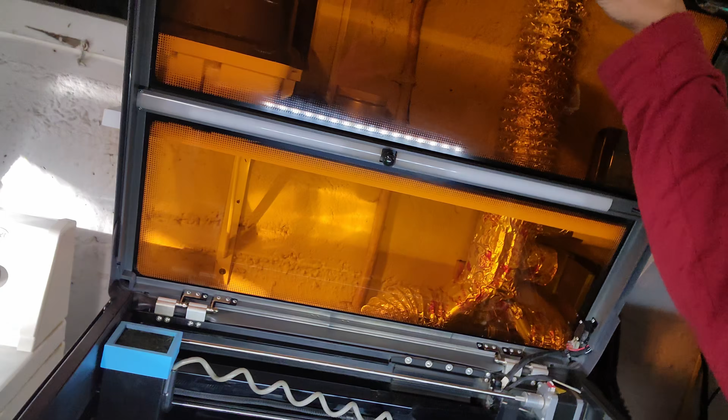So I did some modifications. One of the modifications is a simple shroud that I simply put on the top. Now I know what you guys are going to say - you're going to say, oh no, that's going to prevent the fan from working properly. Well, if you look at it, you can practically see me through it. It's a Chore Boy, and it's actually pretty lightweight.

And I only put it on there when there's a lot of smoke, which there usually is because I do wood exclusively. But I don't think it's going to hurt it too much, because if you've ever heard one of these things, it's got like a jet engine for a coolant fan.

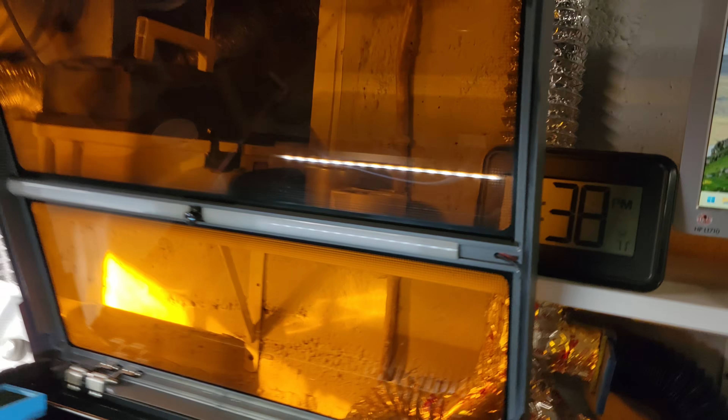Let's see if I can flip you guys around and show you what I did in the back side of it. I printed a bezel that goes from the 3-inch pipe to the 4-inch pipe, because it was such a nightmare to try to attach that 3-inch air duct anywhere. So now it goes to a 4-inch.

And if you can see, pardon the weird angle here, but I actually placed this so I can close off the vent when I need to. These are the two systems, obviously the Xtool S1 and a little case for a laser tree down here.

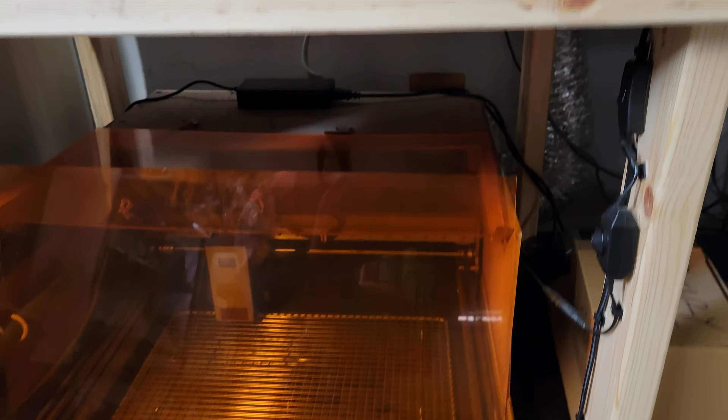I really like this machine now. So yeah, there's going to be another addition.

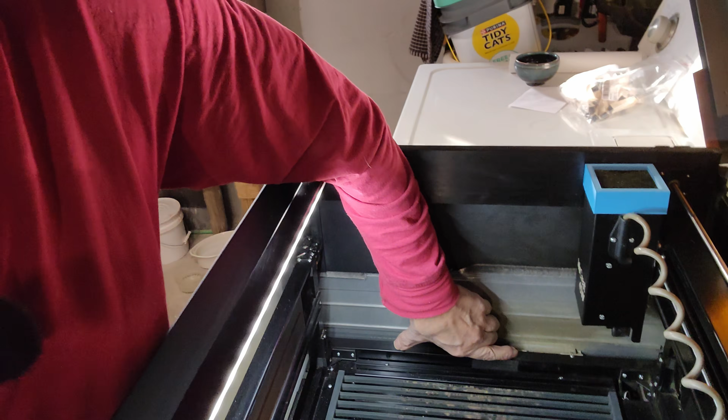What I love about the WeCreat Vision Pro 45 watt is that it has a very easy way to set up their rotary and put the rotary right here. There's 2 screws - it attaches to the frame. And obviously you take these guys out of here. It attaches to the frame and it's very sturdy.

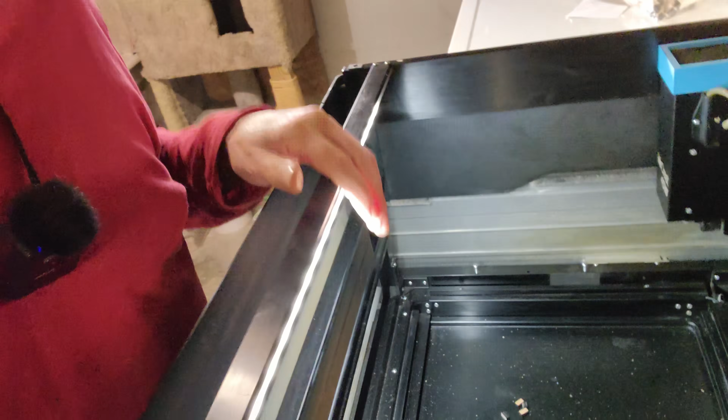And the software allows for you to do your tumblers or whatever. Let me see if I can find the rotary. Here it is - we had a video on the rotary, so you've seen it all before, but here it is. It's nice and compact and very heavy, a hardcore little piece of kit.

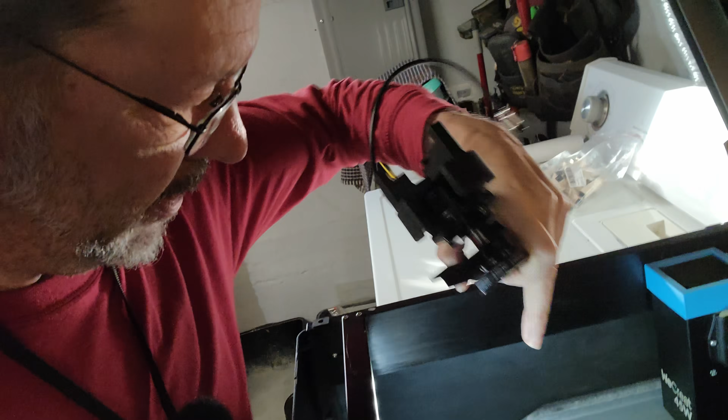And you can see right there is that middle prong that goes down into the middle in between these guys. But the bad thing about it is there's no way to adjust it at an angle.

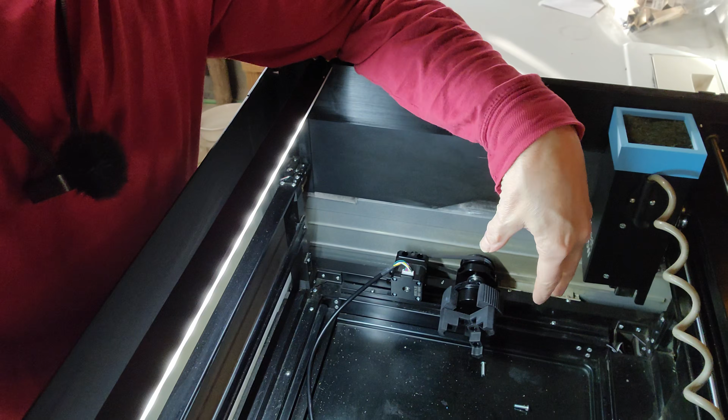Now, a lot of people will have different style mugs and glasses and things, and you'll want it to be able to tilt, because you're going to have something shaped like that you're trying to etch on. And it's not going to allow for a lot of movement with your laser - it'll hit one side of it.

So what you're trying to do is adjust the thing so that will be the angle that you're etching on. Well, that would have to be a down angle. I've seen several things online that will actually hold this entire unit and allow it to tilt, on Etsy and those platforms.

And they want quite a bit of money for them - well, not a ton of money, $50, $30. But why not make one? And so that's what we're doing here.

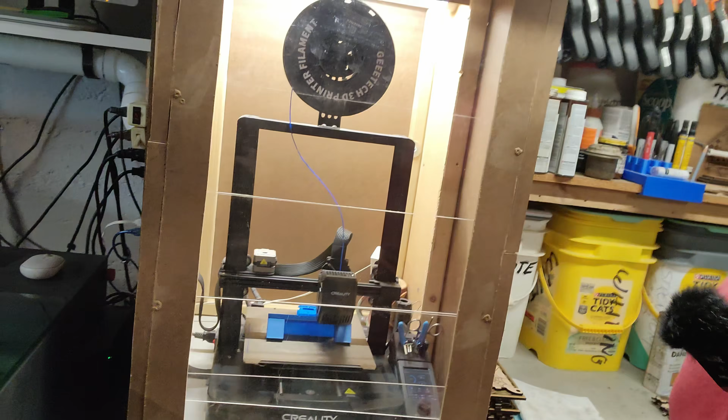We're doing the second part, and I'll show you what the entire thing looks like online right now. If you've only ever downloaded things to use on your new 3D printer and you actually want to make something yourself, I suggest Tinkercad from Autodesk. It's a great online resource for free.

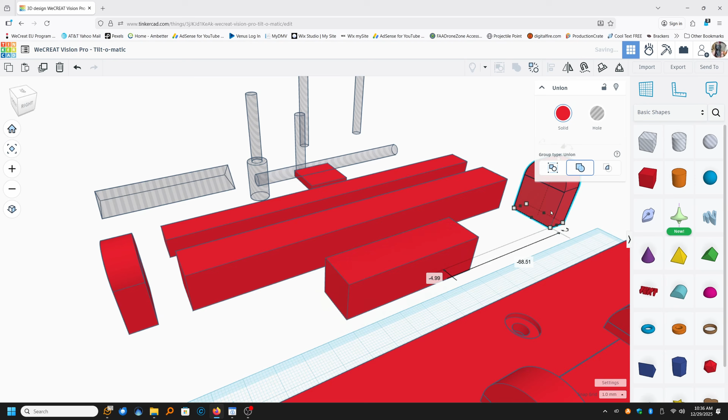And this is the first iteration of this device. Didn't work out so well.

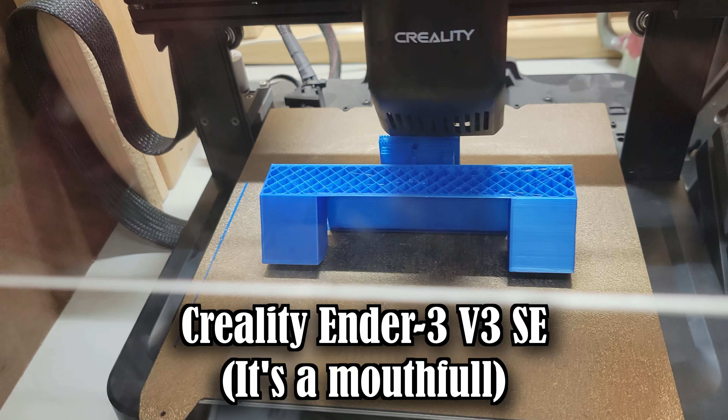After you export it from Tinkercad as an STL file, I bring it into a program that's called a slicer. This slicer is Orca - it seems to work the best with my 3D printer. And the 3D printer I have is a Creality Ender-3 V3 SE, I believe. It's been doing really well for me.

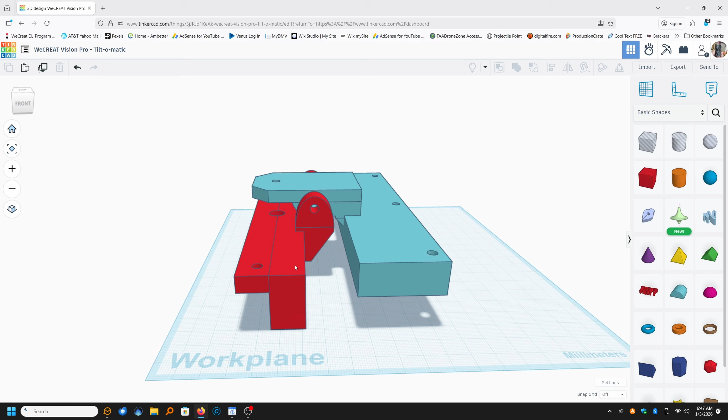These two sections that I made are actually incorrectly designed. I have failed massively. Yeah, so it's back to the drawing board, or back to Tinkercad.

I had to lengthen or extend the hinge so that it could actually point down also, as opposed to just pointing upward. And this is the primary section right here. It seems to look pretty good.

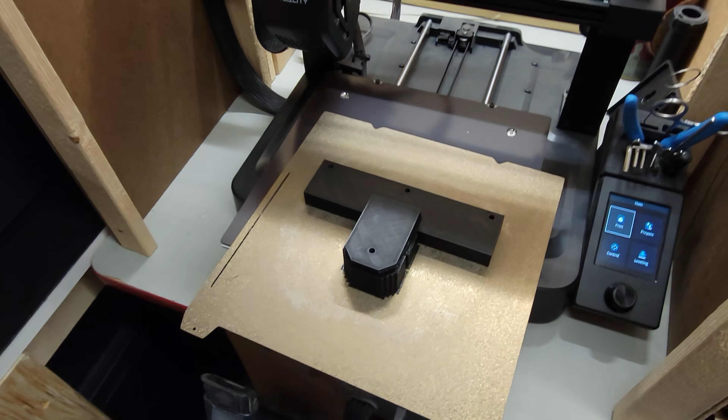I did it out of black - I have a lot of leftover black. What we ended up with...

This is our front piece that attaches to the wall with a hinge on it, hinge point. This allows for a screw to go up in here and to come out. And that screw hopefully will be roughly that size.

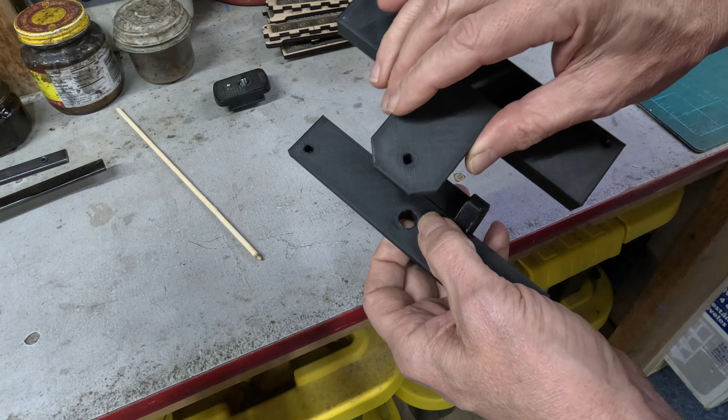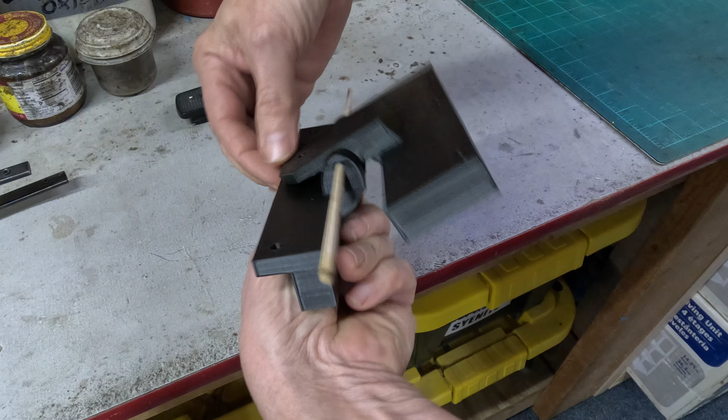Let's see if I can just put this bamboo skewer through here. Yeah, look at that - it's basically a hinge. Now when that's attached to the wall and you tighten this, you should lift it up or allow you enough

downward movement for the rotary so that it actually lets you do something shaped a little more odd, like it would be shaped like a cone, an inverted cone, as opposed to something along that line. So that should work. This is very heavily built, and we're going to keep going.

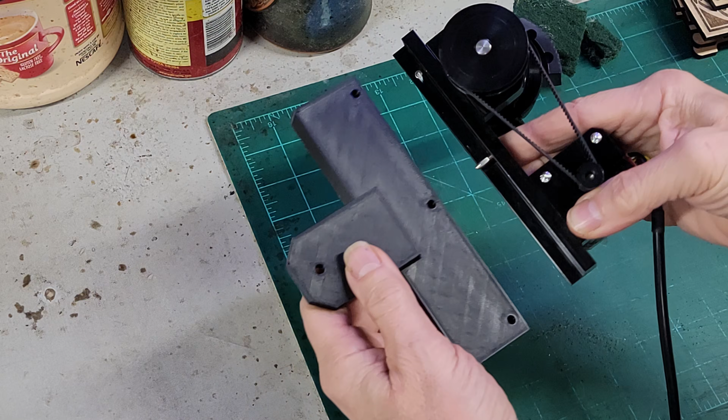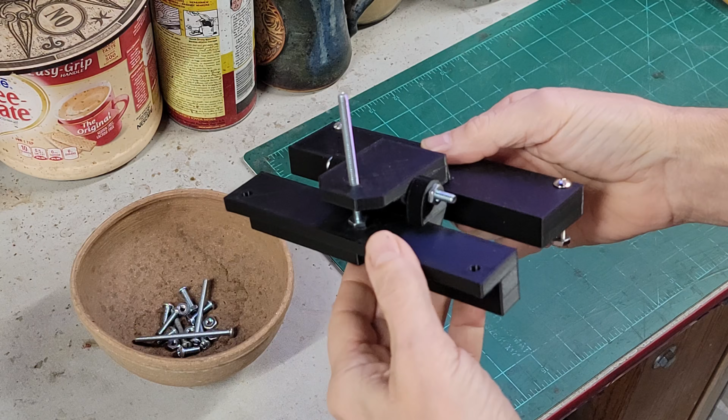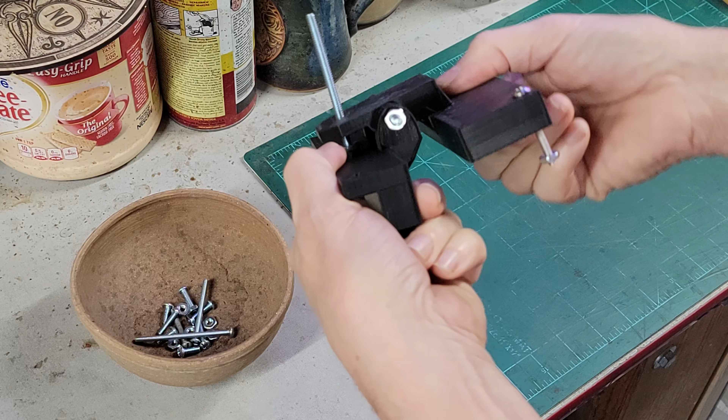Okay, well, it's been a long time coming, but I think we've got a good handle on it. What I've done is I went ahead and put a real bolt through here. I haven't tightened it down or anything. In fact, you probably don't even need the nut on there, but that's going to give us our movement. I found 2 bolts that will work to attach the rotary. Of course, we have our screws, which we've test fitted already.

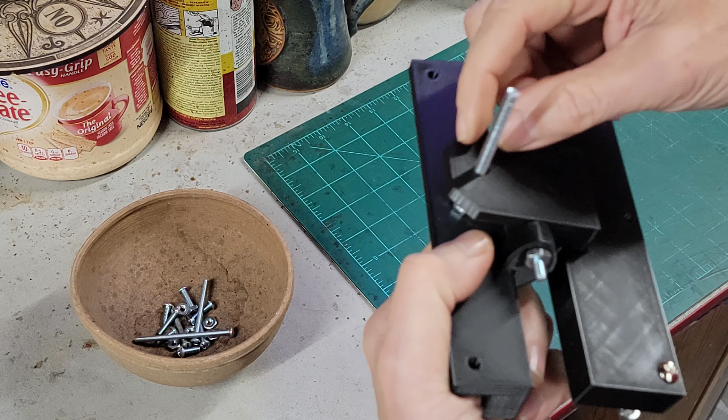This could probably, in the next version of this, instead of just making a hole, which I had to ream out quite a bit with a little file, a little rat tail file - if I make that more of an oval, then it will give full range of motion there.

And eventually, I have lots of little parts. Eventually we will be putting this on there, and I would like to have 3D printed a knob, a big honking knob that this bolt goes up into, because basically what's going to happen is you've got that, and then as soon as you start tightening it, I'm going to hold this down. As soon as you start tightening it, you get it level, or look, it goes up at an angle. Of course, you use a little bubble level, and it stays at that angle.

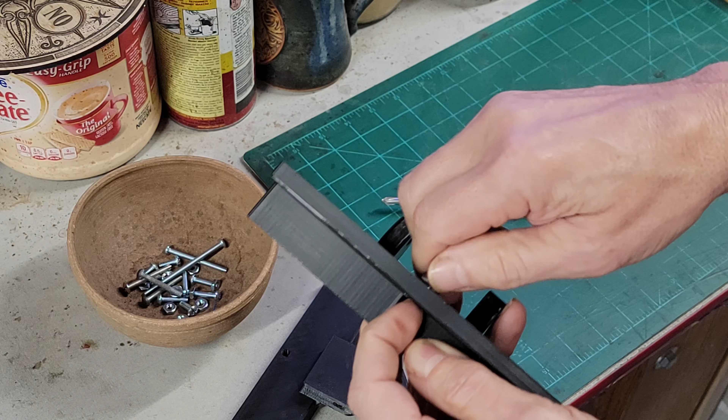Now, before I get too happy with this, I am going to utilize some epoxy up in here and on the top of this, because this post never really needs to move. That needs to be tightened up, but before I tighten it up, I'm going to run some epoxy down in there. I'm going to run it up in here, and I'm going to run it on top of this bolt, or actually run this bolt down on top of it. 2-part epoxy that I am going to mix up very well.

I can just pull this down. Yeah, buddy. And then cover it back up again.

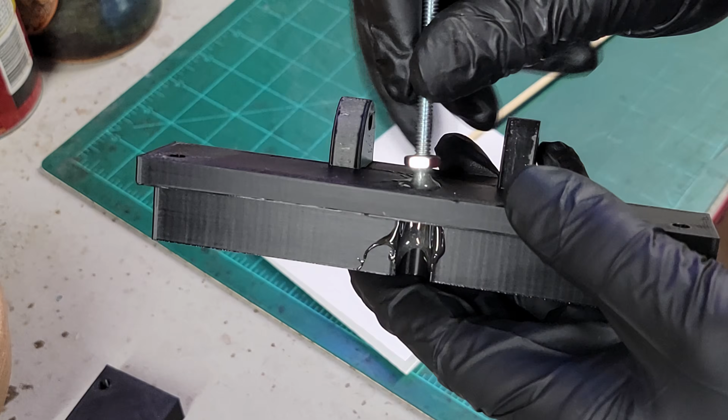All right, while we're waiting for our little friend here to dry with his epoxy on there, I thought I'd just go ahead and reset this back in place and try and run our bolts through here. I've got plenty.

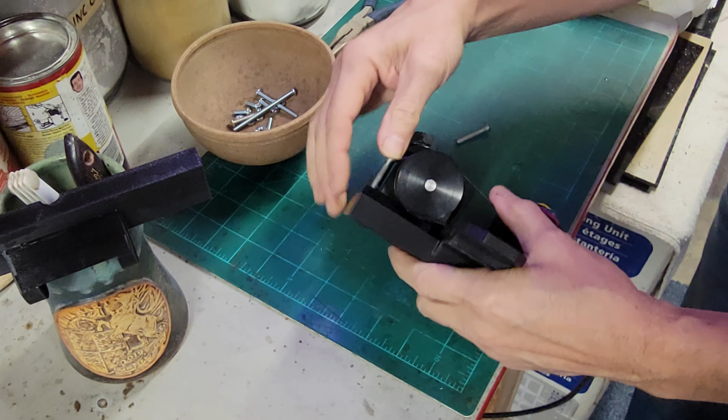All right, well, it turns out that's going to be another case of I really, really, really need a screwdriver. When you design things, it takes a while to prototype them and get them exactly how you want them. This one, it took 2 different prototypes to get to this point.

Gosh, I almost don't need that. Almost don't need a nut on that. I like that. Oh, okay. Well, that one fits better. Boy, that is going to be just perfect on there. There we go.

At first, I thought those were going to be too long, but I am sure glad I found those. Yes, I am. This one here. Wow. That's not going anywhere. Cool. Absolutely awesome. Well, that's a success and a half right there.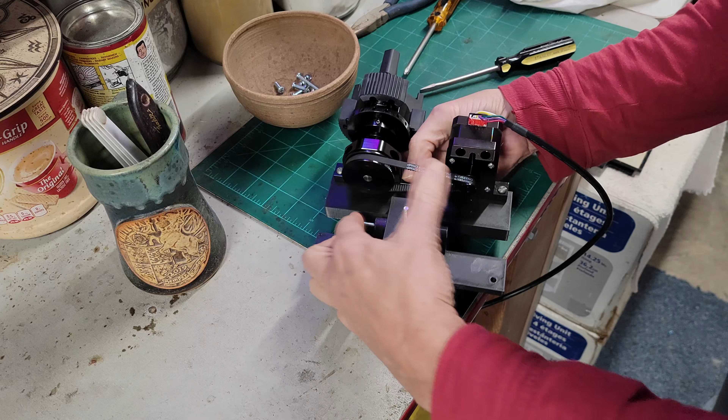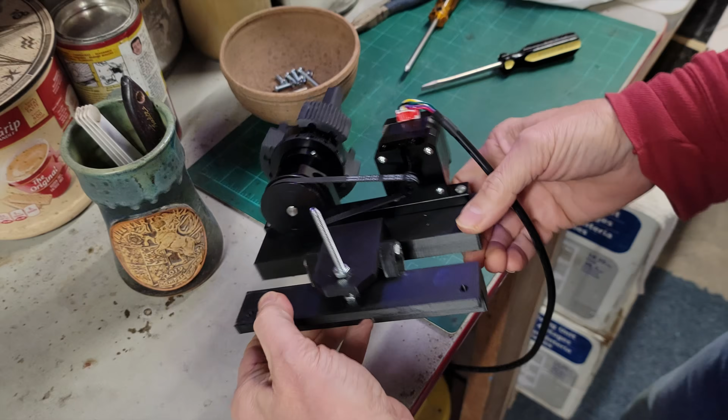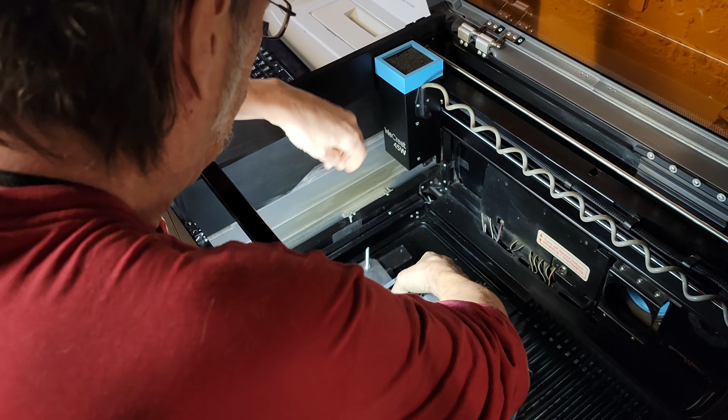Okay guys, moment of truth. Let's see if you can even see me do this. So we're going to take the screws out, and I'll probably fumble ridiculously.

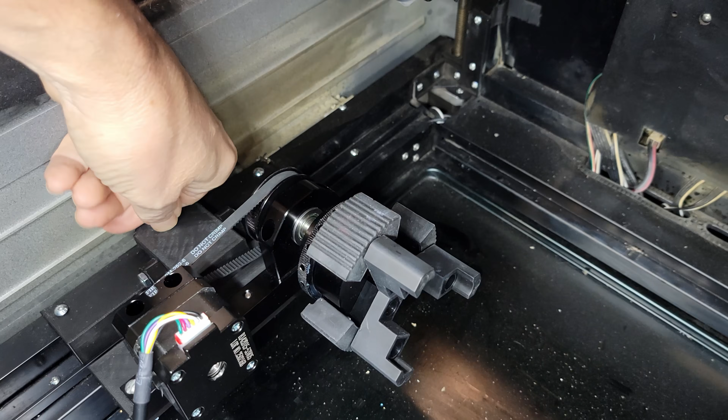That is going to give us a lot of room. And as you can see, it's already raising up, just by me doing that. So by lowering it, well, you can really see that lower. And down. Then of course you'll use your bubble level.

I like that. I like that a lot. Like I said, I'd get a little bit more range of movement if this was more of an oval, that hole. We may do that. The one I put up online for you guys, it will have that implemented. But I'd say that's a great modification right there.

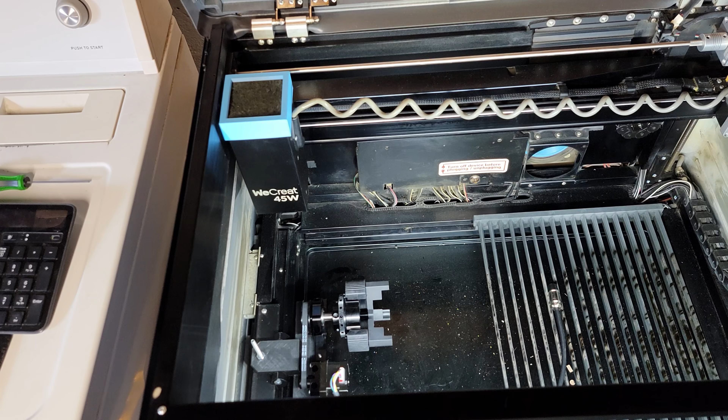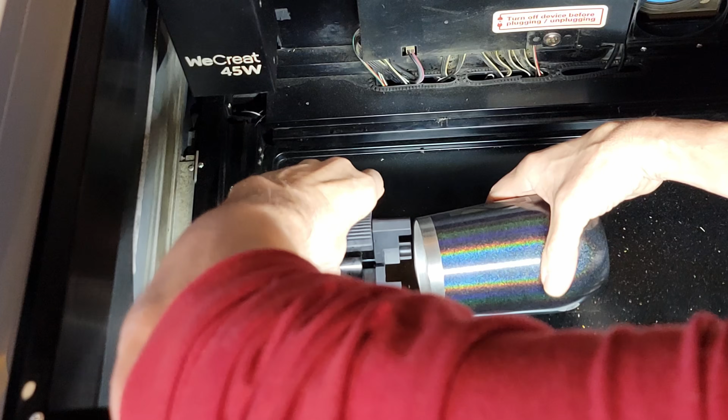Okay, here is a very strangely shaped tumbler that I had a lot of trouble because, well, the thing had to etch a honking weird shape like that. So let's see what happens. What I'd like to do is just see how sturdy this is. And it seems to be holding its own quite well. All right, so it's on there.

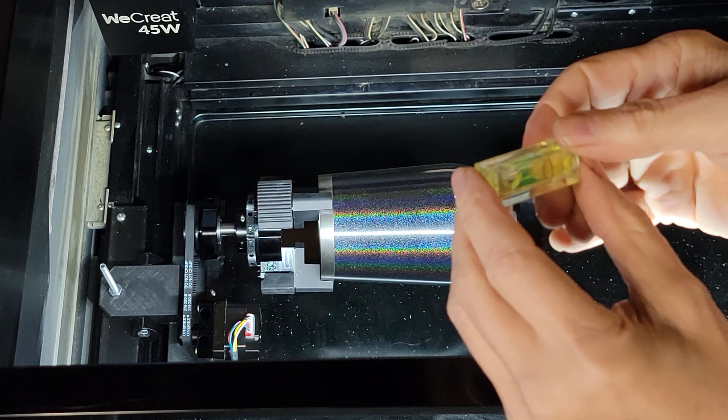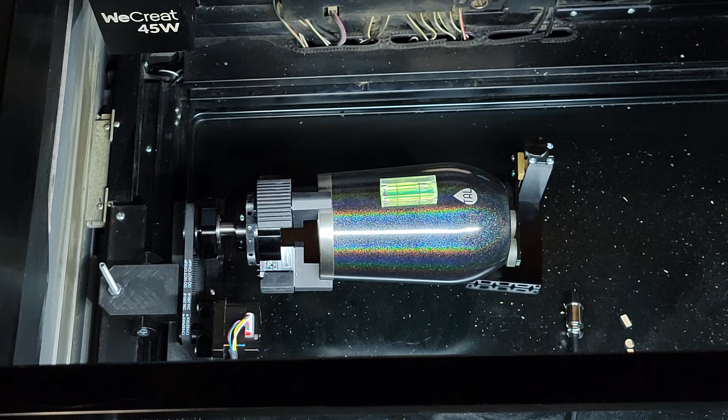Now, the odd thing about the WeCreat Vision and its rotary system that cannot be tilted is they give you a bubble level. Why? Okay, now, assuming we're not going to knock that off there, you guys watch that while I do this.

Like I said, I wish I had a knob. I do have a knob. Look at that. Can you see it? I don't think you can. Let me get you guys closer. Yeah, that's what we're talking about right there.

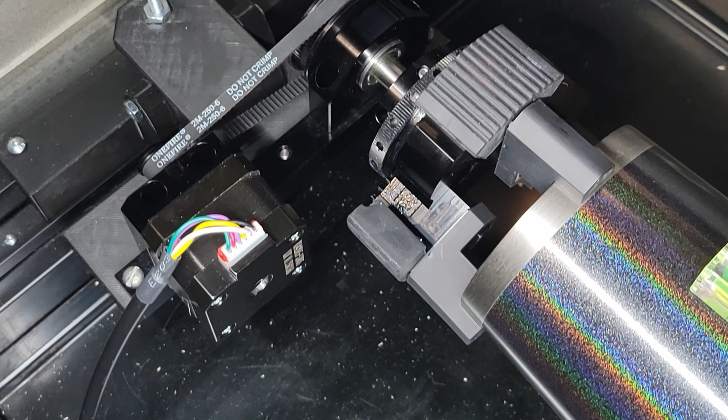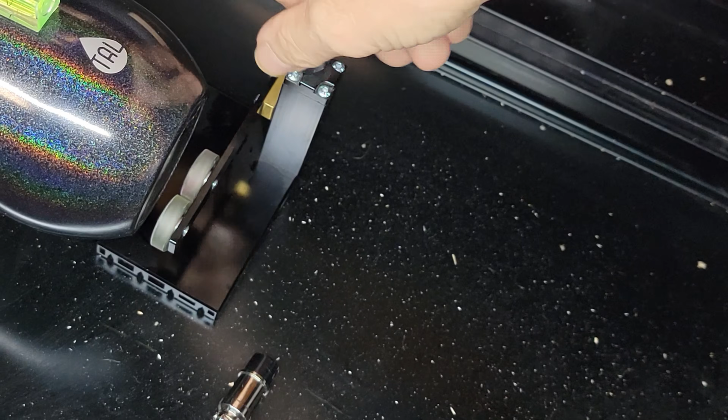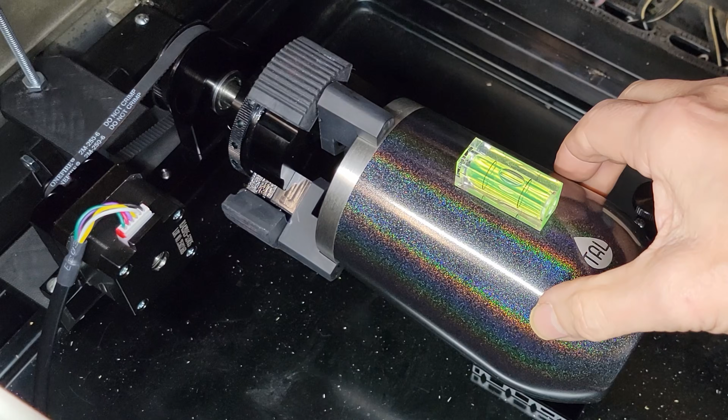Success, success. A little finesse. We need a knob on there. And obviously, once you get this set to where it's supposed to be, you'll want to put this support up under there. I suggest going up under it a little bit further and getting a little tension on there. Yeah. Oh gosh, I'm not even showing it to you. Sorry. Yeah, see, that's what that dude is for.

Well, I'm extremely happy with that. It took a while. I had to go through 3 complete versions of that. They were just modifications of the same version, and I basically just looked at what other people were doing online and said, I could make my own. That's a hinge of all things.